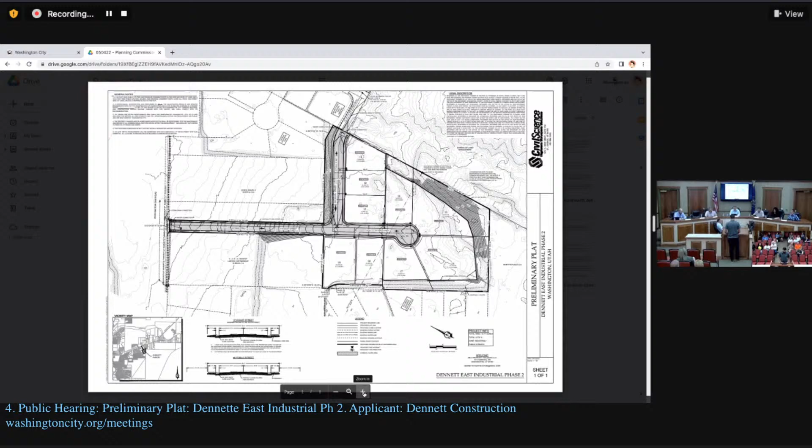Thank you, Commissioners. Eldon Gibbs, City Planner. The applicant is requesting approval of a preliminary plat for the Dennett East Industrial Phase 2 subdivision, proposing 9 lots on 10.77 acres. The zoning designation at this location is Industrial 2. The surrounding zoning is I-1 to the north, planned unit development residential to the east, and I-2 to the south and west. The subdivision is in the hillside overlay zone. The applicant submitted the required hillside application and met with the committee, which determined that this did not warrant their approval or recommendation for approval.

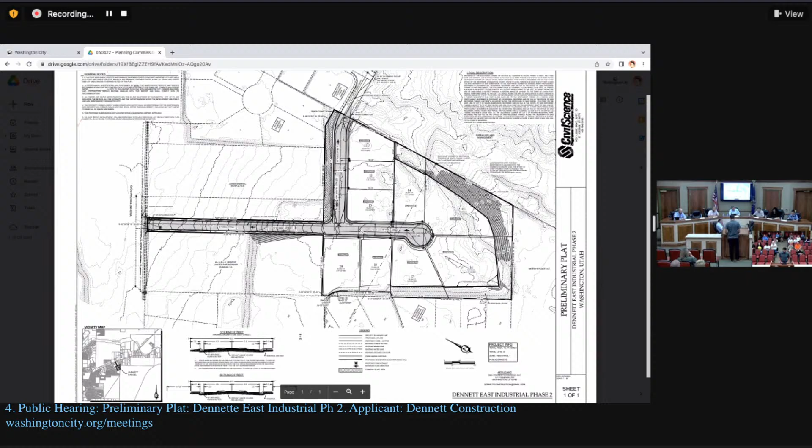The proposed subdivision conforms to the approved zoning. The request meets the subdivision requirements and other city ordinances as it relates to this location, and staff has reviewed the request and recommends approval with conditions of the preliminary plat as outlined. Staff recommends that the Planning Commission recommend approval of the preliminary plat for the Dennett East Industrial Phase 2 subdivision to the City Council based on the findings and conditions in your report. I'm happy to answer any questions you may have.

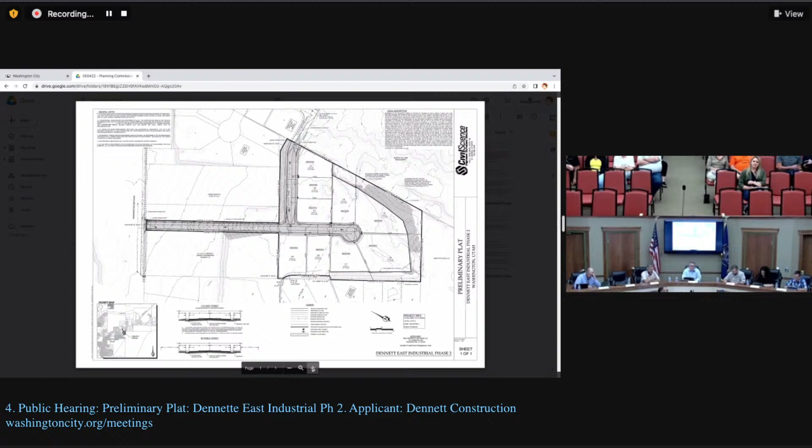At this time, commissioners, if you have any other questions, hold on to them. I'm going to open this up. This is a public hearing. For those of you here in the audience that would like to have a say and speak, if you have any comments, suggestions, or questions regarding this project, please take this opportunity to do so. When you come to the microphone, please state your name for the record.

It doesn't appear that anybody would like to speak on this particular item. I'll look for a motion to close the public hearing from the commissioners. This is Commissioner Bullock, I make a motion to close the public hearing. I second. I've got a first and a second. All in favor? Aye. Okay, the public hearing is now closed.

I'll open it up, commissioners, for any additional questions or comments. This is Commissioner Bullock. I don't know who to address this to, but the public street coming in off of Washington Dam Road, shouldn't it be 60 feet in an industrial area? Because when you drive up Sand Hill Boulevard and there's two semis parked next to each other, it's hard getting a truck through there.

Typically we would have a wider street, but because this was property that was purchased and already in place exactly for this street, we agreed to a narrower right-of-way, with the understanding that if there's any future development on lots on either side, they will have to widen the street. But we're also making this no parking along this segment. Both of those are already developed. Any additional development of those lots would require it.

Okay, but we're going to have cars parked here because this is cutting into K&J's property to the west, taking basically 55 feet of their road, and part of their driveway going in. Their cars will now park along this street because there's no more parking up front. Yeah, this will be no parking. Okay. You hope.

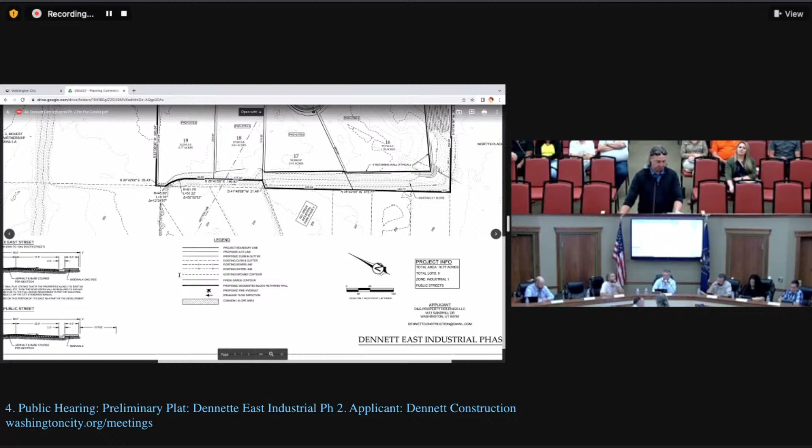What's the hatched area on 1340 South, just to the north? Let's see if I can find it. Common area, slope area - that's what it's labeled on the plat. So that'll just be desert landscape, for retention, right? They'll use it as landscape area, probably with some type of slope protection on it.

Well, this is Sheila - I think it's a little funky, but it's a mess there right now. I don't know, maybe this will clean it up. I think it's a good addition. I just worry about the traffic patterns with everything that's going to go in there, and then who's going to maintain that common area?

That would be my question. Is there an HOA with this? Who maintains this common area? Or is it just going to be dirt? I haven't seen any HOAs. It'll have to be an HOA - so all the property owners, it's just like a residential one, but it'll be an industrial one. They'll all have to be responsible for that.

Is he required to have CC&Rs? Because I haven't seen any CC&Rs that he's done on anything. I don't know if they're required to have those. They just need to say, you know, an HOA could have one paragraph that says the owners will be in charge and maintain it. It says it right there in the general notes.

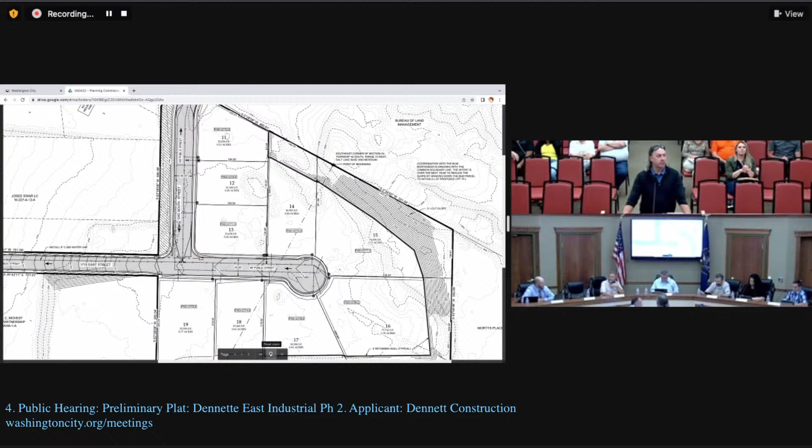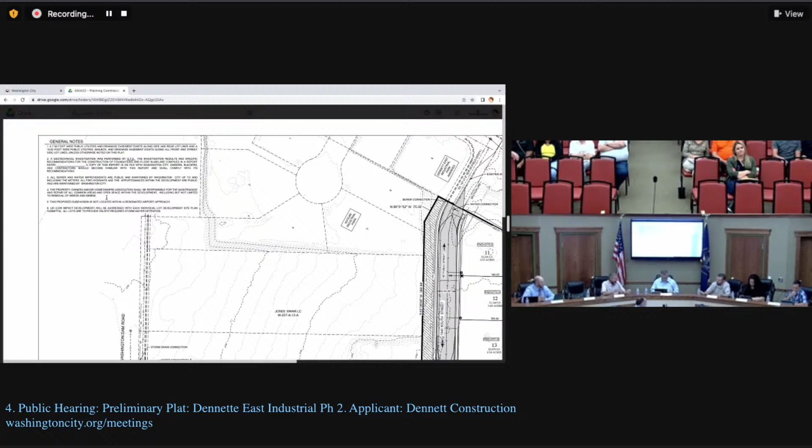When there's common area that won't be privately owned, we require evidence of creation of an association and evidence of some governing document to define how they're going to operate. So note number 4 right there - that's why we put number 4 in all of our plats. Exactly, okay, that's what I was curious about.

That's my office - that's one of my main functions on plats and final plats, making sure those documents have been submitted and that they're in existence before they get approved. All right, cool.

Commissioners, any other questions? I'll look for a motion on item number 4A. This is Commissioner Bullock. I make a motion we approve the preliminary plat for Dennett East Industrial Phase 2 subdivision, located at approximately 1600 East Washington Dam Road, and send this on to City Council with the findings and recommendations.

Commissioner Tupou, I second that. Okay, I've got a motion by Commissioner Bullock and a second by Commissioner Tupou. Individual voting: Commissioner Bullock, aye. Shield.

I'm going to vote nay. I have a hard time with not really seeing CC&Rs or HOA on this. I look at White Sage and the issues up there with parking and on the street. So that's my reasoning.

Commissioner Tupou. Aye. Commissioner Mitchell. Aye. Commissioner Hanson. I'm an aye as well. The motion passes. We'll send that to City Council with our recommendation for approval.

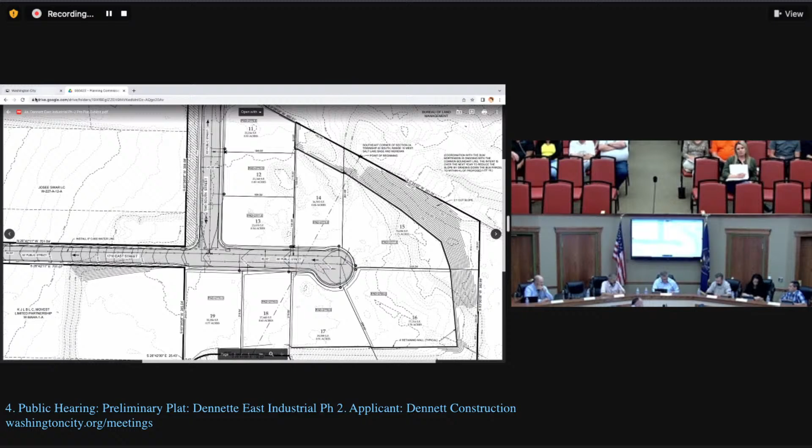Item number 5A is also a public hearing for consideration and recommendation to City Council for a zone change request Z-2206 from MH to PUD-R, located approximately at 51 Turner Drive, 50 West and 100 North. The applicant is Tom and Sarah of the Rockworth Company. I'll turn the time over to staff for their report.

Thank you, Commissioners. As stated, the applicant's requesting approval of a zone change of approximately 11.22 acres. The property is currently a mix of mobile home, PUD, and R3 zoning designations. The applicant wishes to have the property rezoned to a planned unit development residential zoning designation under the multifamily standards.

The PUDR request is for the purpose of developing the 11.22 acres into an apartment complex in the form of 58 one-bedroom units and 122 three-bedroom units. This would be a total of 180 dwelling units throughout the development project, equaling a density ratio of 16.04 on the 11.22 acres.

The surrounding zoning of the proposed development is open space, which is the I-15 corridor to the north, R16 to the east, and R3 and C2 to the west and south. The allowed density according to the general plan use map is 13 to 16 dwelling units per acre, and they fall in the high density residential designation.

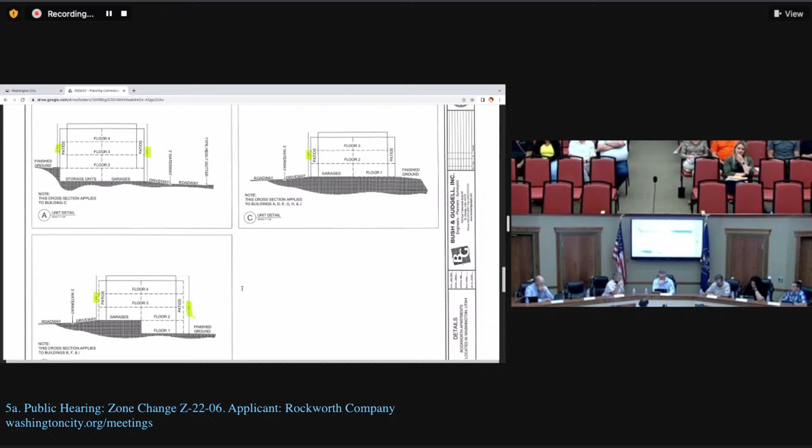This gives you a sample where the unit with the C detail is actually a 2-story with a garage and actual floor area, while the ones that are kind of 3/4 story have storage or no storage, as you can see in the different exhibits on these cross sections.

Getting into the exterior finish on the building, it'll be a mix of Hardie board finish with stone and stucco throughout. This is the units that have the 3-story with parking in the back. Below, this is what the 2-story looks like with parking around the back as well.

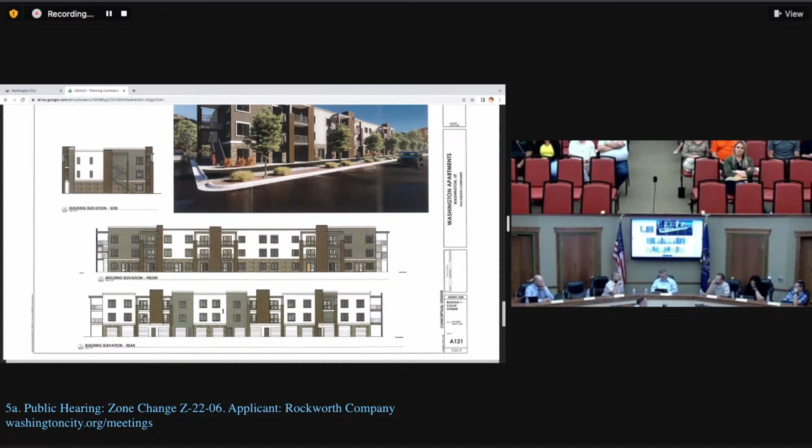The live picture versus the drawing. Here's a sample of the products: manufactured stone veneers, fiber cement with horizontal and vertical siding, stucco, and a fiber wood grain product, which isn't new but is being more utilized. There's a variety of different finishes so it's not stale.

So with that, commissioners, that's my report to you. I'll be glad to answer any questions you have before you open up your public hearing.

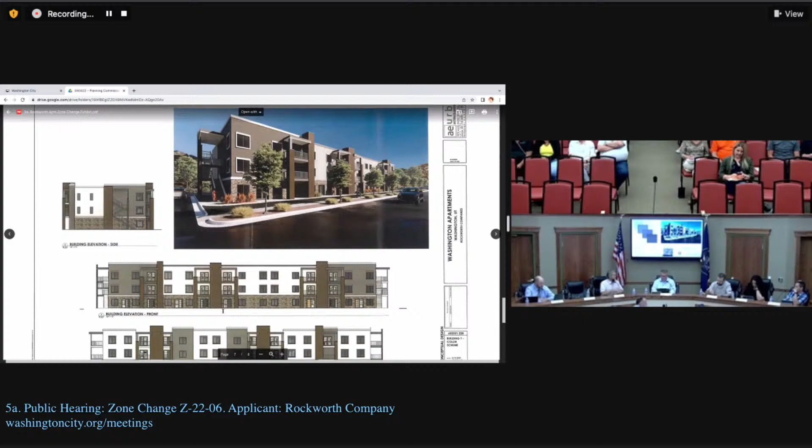Commissioner Bullock: On Building J, it shows carports in that section. Are those carports the dotted line there? And is it that way on Building I too? We'll have the applicant come up, but I'm going to guess Building J is a 4-story, and Building I... never mind, I believe it will be a 2-story with a driveway.

But is there parking in front? Yes, that's every one of these, driveways going into the underground garages. I wouldn't call it underground parking, more like garages. And then there's an elevation change coming around to the fronts. That's what I was wondering about, I didn't see that until you mentioned it. I was worried about parking for those units. Every one of them has a driveway into the parking, garages underneath, and then they'll walk around or likely enter through their garages, I would imagine. We'll have them clarify that, but I imagine that's what they are.

All right, commissioners, any other questions, initial questions for staff?

Commissioner Mitchell: A question that comes to mind for me - so 500 West is the only entrance or exit, correct? Theoretically that would be, we'll pull that up here. I'm trying to visualize in my mind. There's not a light at that intersection of Telegraph and 500 West, right? Not yet. That was just a thought I had, regarding the potential traffic flow.

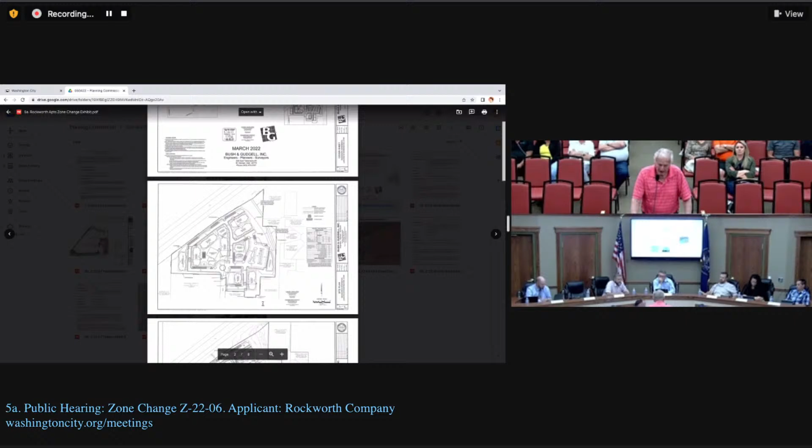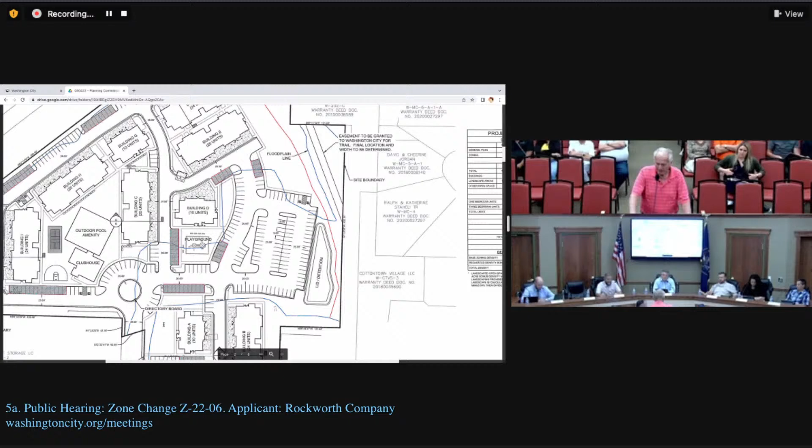I'm concerned that if more water comes down and goes out into the creek, it's going to create a wash there also, just like it has down below where it comes off the apartments below. I don't know if I should address all these things here in public or whether I should come in and address them at another time. So that's up to you, what you want me to do.

My recommendation, George, would be to give us the short version this evening so it's on the record. City Council has a chance to review these, and then I would invite you back.

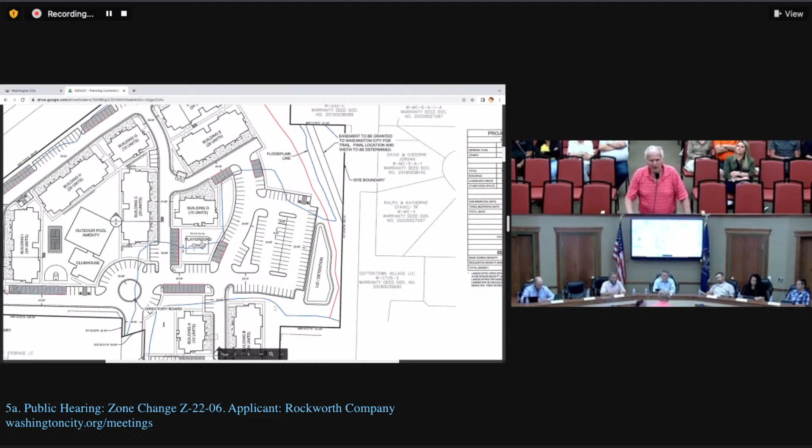Okay, I need to know where the creek is, that's not turned in any direction that I can really see it. You'll see there, George, the floodplain line at the upper right that's in red and blue. You'll see those lines there on the monitor.

This here is our property line right here, and it goes up to up there. This is the floodplain. The creek, I can't even see where it is, but it comes down through here. So any water that runs off of here would come out in one place.

Now they're putting this fence along here. They're going to have to create a place where it comes out in one place instead of, as it did before, on long wide area. The creek now that's here has washed about 8 or 10 feet deep instead of being flat like it was.

So if the retention pond fills up, where is that water going to go? Is it going to go into this here, and out into their place, and cut another gully in here just like it has down here, where we can't do anything with?

I don't know. Those things have got to be addressed. I'm also concerned that... excuse me, only because she can't hear you, and we want to get it on the record. I'm also concerned with the size of sewer pipe that runs down through the creek by putting another 181 units into that.

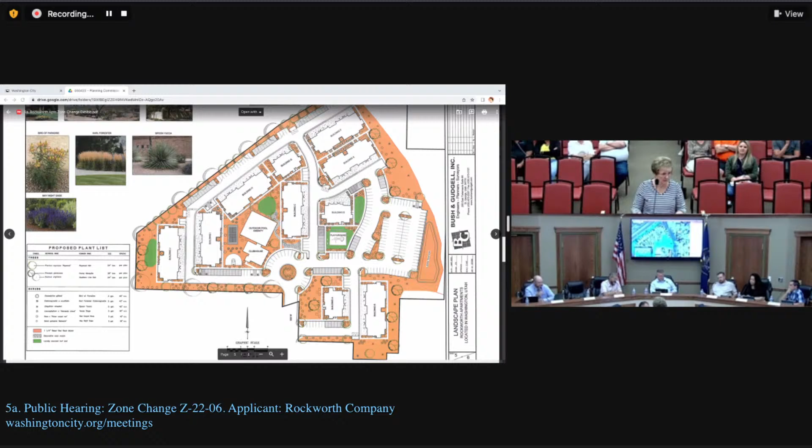The challenge with your backyard isn't you, it's that there's a creek down there, right? Yeah, I mean, kids are kids. My kids were kids once too. So I'm just concerned about that, and that many more kids. So that's all I have. Thank you. Thanks, Katherine.

George, we'll let other people come up before we do seconds. Unless no one else is coming up, is there anybody else that would like to come up for the record?

All right, George. One thing I forgot to talk about is where they come out onto Telegraph, that's an illegal street. All the streets should be 90 degrees, and those don't come in at 90 degrees. So the city's got to look at that, and look at how you're going to put a light on that street the way it's designed now. It's almost impossible because of the way the street's designed.

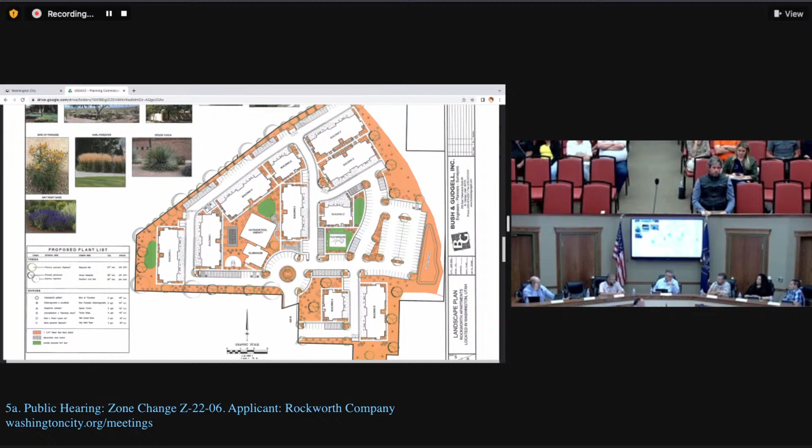Have we analyzed that, Drew? I haven't done that analysis, so I don't know for sure how to answer that question, just because I don't know the answer. Okay, but that's just what everybody's talking about—that was the question that came to my mind. With R3 and the trailer parks, there was kind of yards and some space between them, so it's likely that they could have had greater density than they actually had.

If you look at the old images, you'll see that even though trailer parks have their characteristics, there's usually space between them because they're just little mini houses with folks having a little yard, so it's likely they could have accomplished greater density than they did.

If they were to come back under that same zoning, we'd have to recalculate their maxes. It looks like it's zoned the same as the Pearl condominiums, general plan designated high density. We don't have high density zoning, but we have general plan high density, which means it's high density residential with a density ratio stated within that. Our general plan says high density is 13 to 16 dwelling units per acre, somewhere in there.

Our PUD allows for increases in credits if you do certain things, but they probably don't need any credits. They're at 16.04, but they added 30% extra landscaping area they could have left open and not gotten that credit. Instead they're actually going to landscape it, put trees, shrubs, bushes and ground cover over 30% more than what they needed to according to the PUD zoning. So in essence they can get a little bit more; all they're really needing is 0.04 dwelling units per acre to get to the 180.

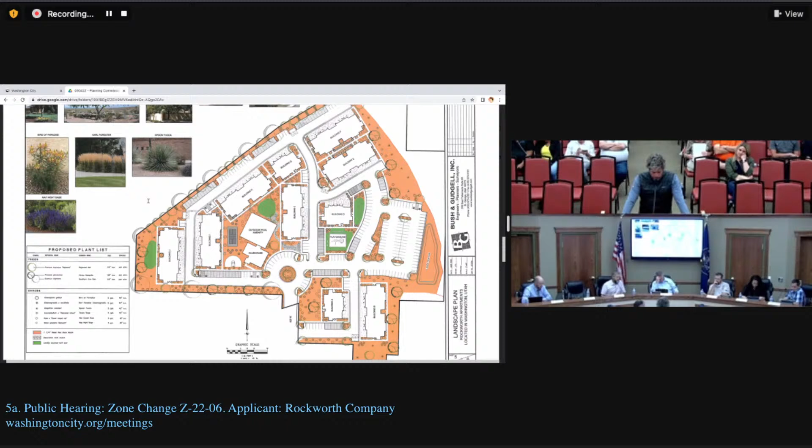We know and recognize that, and expect that all of these concerns will be addressed through final engineering. A couple of the other conditions that have been raised are also met by the conditions. Condition number 6, as has been pointed out, calls for a block wall along the north boundary and also along the east boundary. We're comfortable with this condition, but we do have a question for staff and would like to work this out.

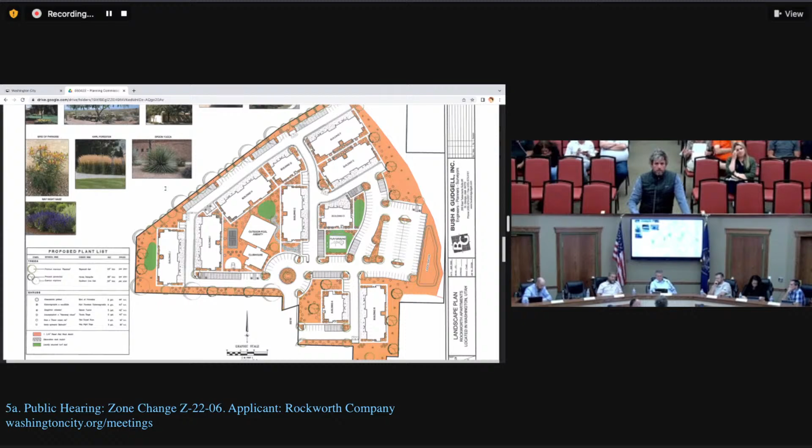One of the things is that along Mill Creek, there are plans by the city to have a future trail system. We're actually dedicating an easement along there, so we just want to make sure that as we're working with staff on this wall, there's also access to the trail and we maintain access for our residents and the public, and make sure the wall is designed accordingly.

Additionally, one other condition we'd like to point out is condition number 11. We're a little— scratch that. Okay, I've already scratched it. Again, just like to thank staff for the opportunity to work with them.

We do feel like we've created a good project. I know there's been some questions about density. As Mr. Ellerman has pointed out, we're barely over the allowable density, but we're still open to the PUD process, going through it to make sure this project is one that the city is comfortable with and that we're comfortable with as the owners. 16 units to the acre falls under the high density requirements, and we feel comfortable with that density. I'll just point out one additional concern that's been raised, and Mr. Ellerman, if you could pull up the site plan.

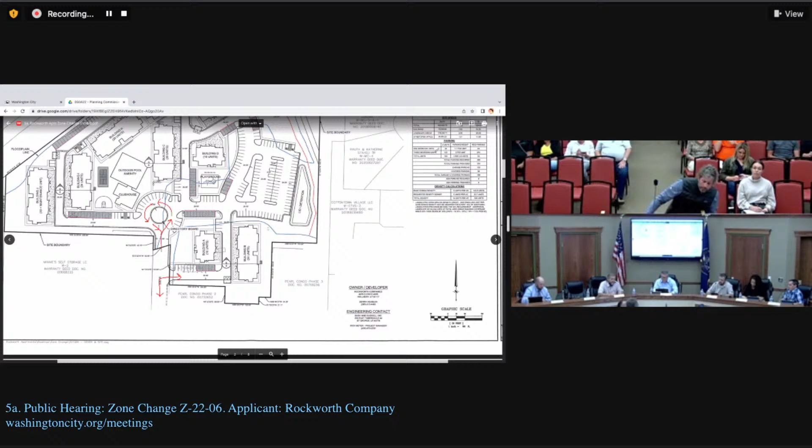Adam, thanks for your time, I appreciate it. Sure, one last comment Commissioner. Just to clarify, in the staff report it calls out 1 and 3 bedrooms, but they're actually a mix of 1, 2, and 3s. I think the confusion arises because the parking is calculated the same. I'm just going off your call out. Yeah, maybe that was for parking. So there will be 1, 2, and 3 bedrooms, I just wanted to clarify that. Approximately 58 ones, 92 twos, and 32 threes, I believe. Thank you.

If you can go back to the GIS map, where Cotton Town, what is it called? Cottontown Village, Coles and all that, Cotton Mill number 2. That empty space right up there, if you go up by the freeway, it's just that triangle right there. Is that future growth? What is that?

That's drainage, that's a big regional drainage. Oh is it? Okay, that's what I was wondering. I didn't know, because I thought the same thing, I thought well we'll just maybe pop through there and add another one. But that's, I am correct, right John? It's a major drainage swale. Okay, and it picks up a lot of the I-15 water, if I remember right. So yeah, that's what I was curious about, what that was and why it was left there, just for an emergency access if they had to.

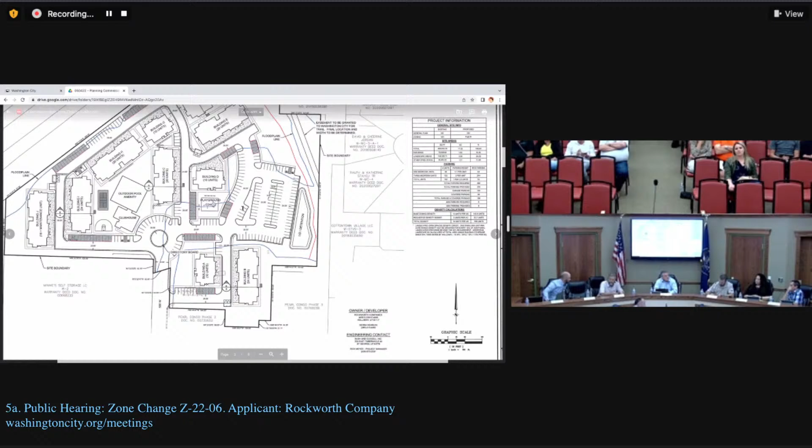Of all the comments you've heard this evening, are there any that have not been or will not be addressed and mitigated with staff, either prior to or after this? Is there anything new, like oh we didn't think of that? I mean there's answers you guys know from prior meetings where these things have been addressed, and I hear residents say things and I'm like no. The only thing that popped out is we want to look into the sewer line and see if that's been taken care of. I'm sure it has something to do with it, it's downstream, but it would be nice to make sure that's been addressed. I'm sure they knew about it because that's probably the first people you guys called, was the city. They came to us.

I don't know about George. Okay, because I remember hearing about this a while back. So I just want to make sure they might have run their snakes and or cameras and found out what was going on. We'll look into it, and I'm sure we'll know. We'll just get with the sewer department and find out what those things were and get the, you know, what's been addressed for them.

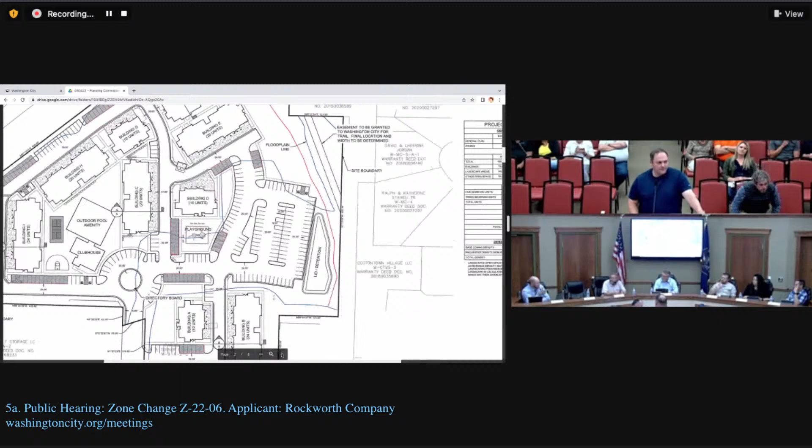Hey, my name is Rick Meyer with Bush and Gudgell, and just to reiterate what Thad's saying, the current setup with the mobile home park doesn't have a detention pond, and it's fair to say there's a pretty high impervious area in that mobile home park. So by putting in something similar in imperviousness as the mobile home park, but adding a detention pond, it's going to be a lot lower runoff than what the mobile home park was. This project will have curbing, inflows, and collection locations for stormwater—things we require now that weren't even on our books when that project went in.

Can I just make one other comment? Just since we're making comments. Not sure if I lost control of this meeting or if this is normal, but go ahead, Rick.

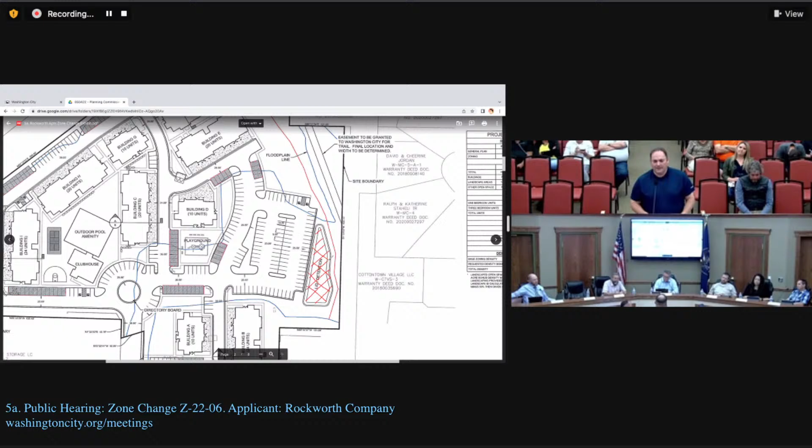Just to speak to the children issue, I understand the concern and everything, but there's going to be a lot of amenities here: playgrounds, a pickleball court, basketball, a pool. I think that's going to keep the kids on their grounds instead of somewhere else. So thanks. Perfect, thank you.

Commissioners, do you have any major concerns about this project that we haven't addressed, or something making you want to go one way or the other on the vote that's worth discussing, Chairman? Before that, there's also the question of how much density they could have had under prior or existing zoning—staff will try to get a better estimate on that, as well as the sewer question you'd asked previously. We'll try to get some data on that.

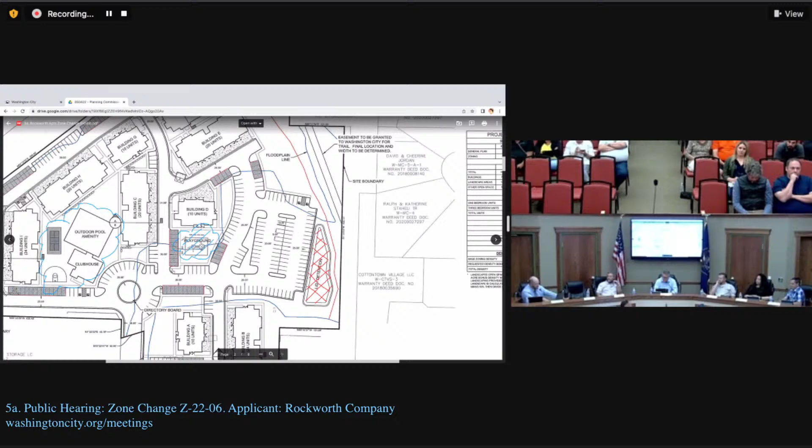I'll still leave my question open. Commissioners, anything else you'd like to say between us? Commissioner Mitchell, I think the one thing that's still hanging up a little is that density possibility, just because anybody who's been in that area knows how complicated it can be to function. Most of the time you hit the stoplight, you go through the other places to get to the stoplight to come out onto Telegraph if you're smart. That's my only reservation—potentially if we're increasing the density in that location, what would we be doing? I honestly don't remember.

Hey Melody, I'm going to put you on the spot to find out if we've closed the public hearing. I believe that we did, but I need to confirm that. You did not officially, but twice—yeah, you did close it. We did close it. I'm going to look for a backup motion to close the public hearing from the commissioners. Ms. Schill, I would recommend we close this public hearing again. This is Mitchell, I second. All right, I've got a first and a second to close the public hearing again. All in favor? Aye. Okay, back to where we were. Sorry.

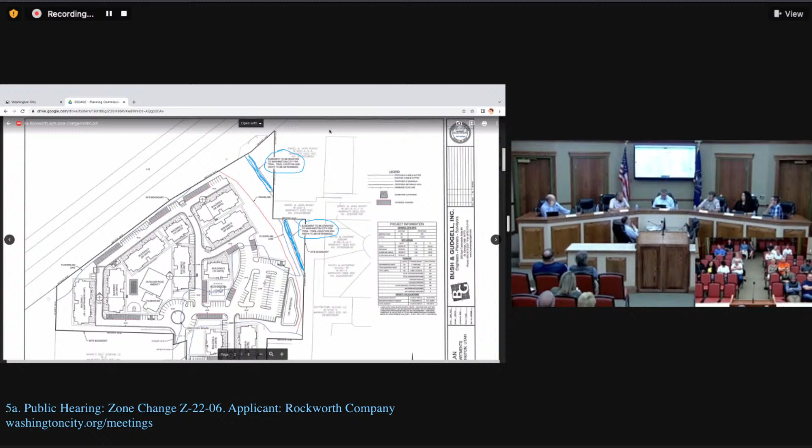So in my limited knowledge, I'm still kind of hung up on what they potentially could do versus what they would do here. Are we really? So this body essentially can table, recommend approval, or recommend denial. I don't see anything that justifies tabling. There's a couple of issues staff are going to get research so that answers can be given with more clarity on the sewer and on the previous density.

I think what Commissioner Schill attempted was to recommend denial and then give his opinion on the record so the council can know the reasons why, and the commissioners are welcome to do that either at the motion, at the second, or at their vote. That help you at all? I know you're newer to this. And so it's essentially a recommendation of denial on density, and then you've got Commissioner Schill's personal views on what the density should be.

So again, I have a first by Commissioner Schill. I'll look for a second or additional comments or another motion, correct? Well, you would just say that the motion, if nobody seconds, it just dies with a lack of a second is what you kind of do. So those are kind of the options. Any time anybody makes a motion, nobody wants a second, the motion just dies due to a lack of a second. All right. So I'll look for any of the three of you to second that, or I'll look for a new motion.

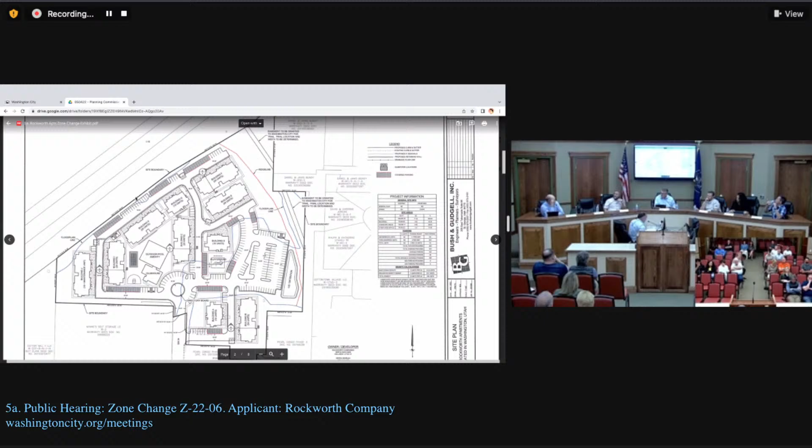So with that being said, the motion of denial passes 3-2. The motion of recommending denial, sorry, the motion recommending denial passes 3-2, and this will be sent to city council as such. Correct, and they will hear it on May 25th.

So May 25th, those of you here that have interest in this particular item, if you'd like to come and take your 3 minutes at city council as well, you're welcome to do so.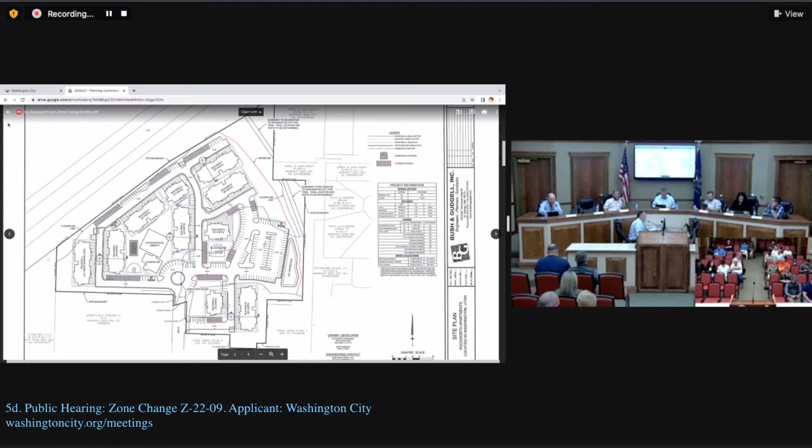And I have got to give an award to Mr. George Staley. I have never seen somebody get so much leverage out of his 3 minutes. It's pretty good. I don't even know how that happened.

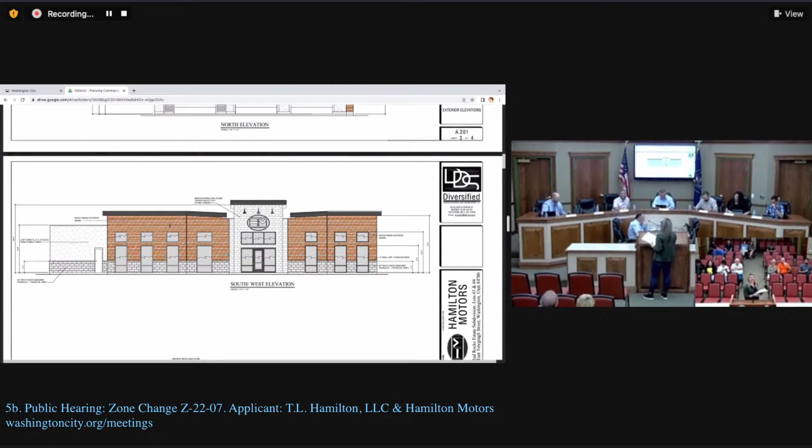I think she just asked for greater restrictions, didn't she? After my project, right? So is that north boundary the boundary along Frontier?

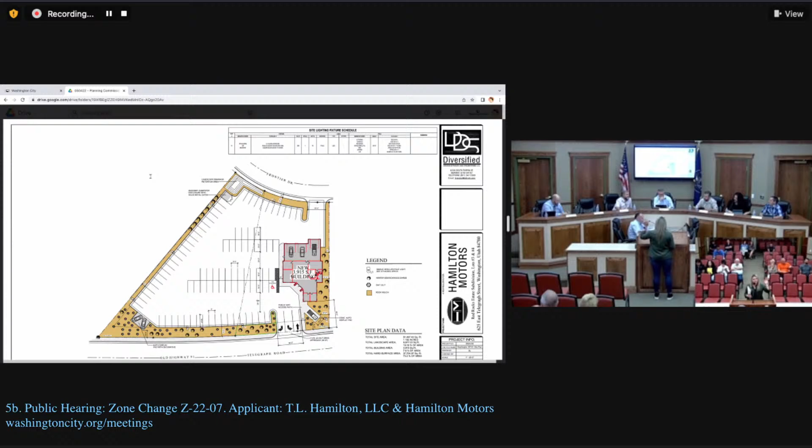If you Google Hamilton Motors Lehi, you'll be able to show a street view of the building - that might be useful. Are you going to bring that old truck to us or leave that one up there? I like that one, who knows - it's cool, huh. Yeah, I did submit some pictures early on to Eldon, and they didn't make it in the packet, but if you Google it, you'll see what the existing building looks like.

Sometimes it takes the old dog a little while to figure out Airplay. Oh, I'm on my laptop. I can do it on this one. I'll get there. Being tech savvy wasn't in my interviews. Which one are we going to again? It's conference room or council room in all caps. There we go. So that's the truck I was talking about.

That's the building there. What was that business? An assisted living center. Yeah.

I'll just go along the road and kind of show you the look there. Your parking lights in your parking lot, that won't fly here. I know, I know those lights.

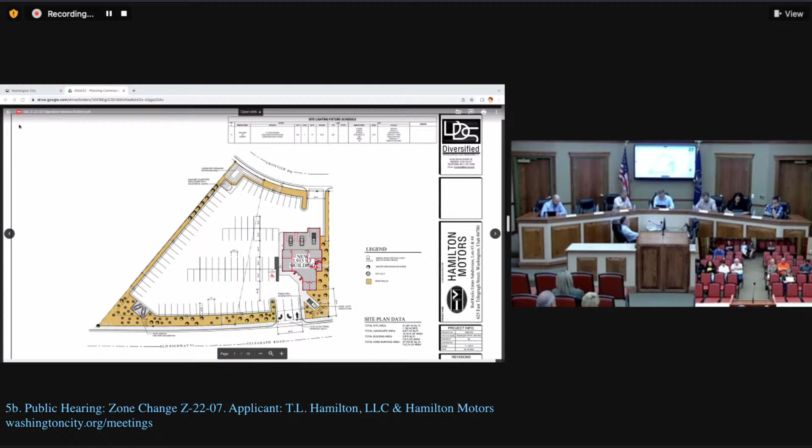I've got a motion by Commissioner Tupou. I've got a second by Commissioner Bullock. Individual voting: Commissioner Bullock, aye. Shield, aye. Tupou, aye. Mitchell, aye. Hanson, I'm an aye as well. Item number 5B passes. We will send that to City Council with a recommendation for approval, again on the 25th of May.

We'll move along to item number 5C. This is also a public hearing for consideration and recommendation to City Council for a zone change request, Z-22-08, from agricultural 20 to residential half acre, located at approximately 3930 South, 200 West. The applicant is Stephen Simister. I'll turn the time over to staff for their report.

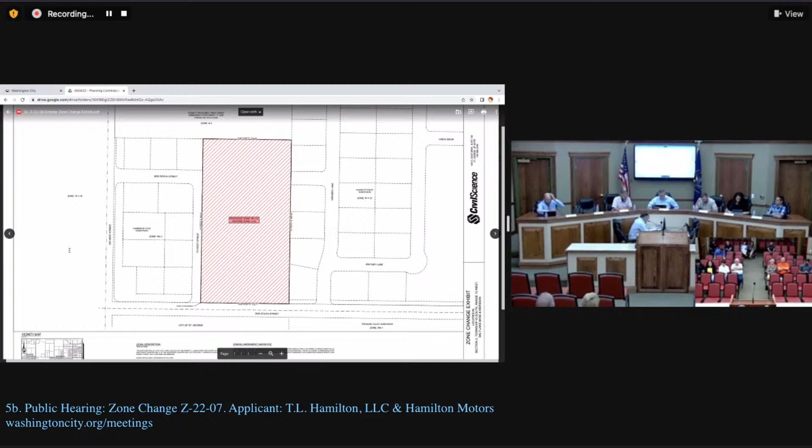Thank you. As stated, applicants request approval of a zone change of approximately 4.427 acres. The current zoning is agricultural 20-acre minimum. They are wishing to go to the proposed residential agricultural half-acre minimum, referred to as the RA half zoning designation, for the purpose of developing the parcel into a personal residence. This location has a general land use designation of low-density residential, which allows for the R110, R112, and larger zoning districts. Surrounding zoning of the parcel is A20 to the north, R112 to the east, RA1 to the west.

St. George City zoning is to the south, and it appears to be for larger estate lots, as I looked on the aerial view. Staff has no concerns with the proposed zone change as outlined; the applicant appears to be in harmony with surrounding land uses. Staff would therefore like to recommend that the Planning Commission recommend approval of Z-22-08 for the zone change from A20 to RA half, on to the City Council based on the findings in the report. I'll be glad to answer any questions.

If you want, I'll bring this up on the aerial, unless you kind of know where it is. Then I'd be very impressed with you.

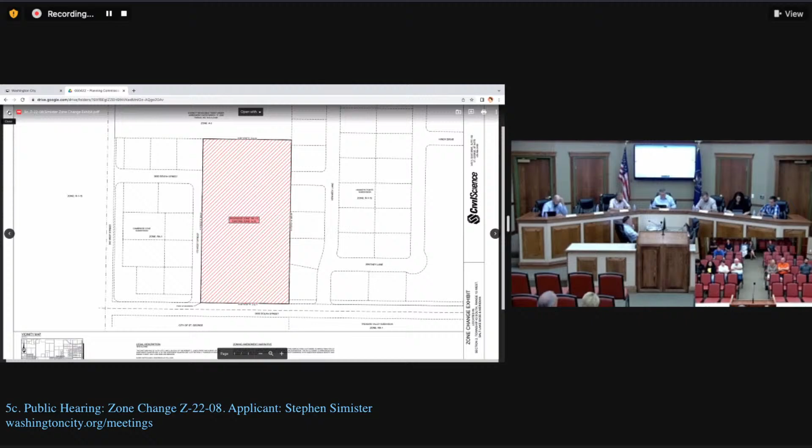Commissioner Tupou seconds the motion. Motion by Commissioner Bullock, second by Commissioner Tupou. Individual voting: Commissioner Bullock, Aye. Commissioner Shield, Aye. Commissioner Tupou, Aye. Commissioner Mitchell, Aye. Commissioner Hanson, Aye as well. This motion passes unanimously. We'll send that to city council with a recommendation for approval.

Item number 5D is also a public hearing for consideration and recommendation to the city council for a zone change request, Z-22-09, from Open Space to C3. The applicant is Rusty Hughes on behalf of Washington City. We'll turn the time over to staff.

Thank you. As stated, the applicant is requesting approval of a zone change of approximately 0.78 acres. The request is from Open Space to a proposed C3 zoning designation. The C3 request is for a possible land trade with the adjoining property owner. The C3 designation is needed for possible signage use.

The current needs relate to a particular sign out there now - the Sienna Hills sign needs to be relocated. Most of you have heard there's an auto mall coming into this particular area. If you haven't, you know where you've been, but anyway. So the city is wanting to trade land. Hey John, have you heard of the auto mall? Okay.

So we're wanting to trade land. The city acquired this actually through UDOT - it was left over from the I-15 corridor and was given to the city. It's just a thin piece that we'll never be able to develop for much of anything, so it's a great piece to trade. It helps them out. So that's kind of what this zone change is for, just to get it available for them to use for a possible signage location.

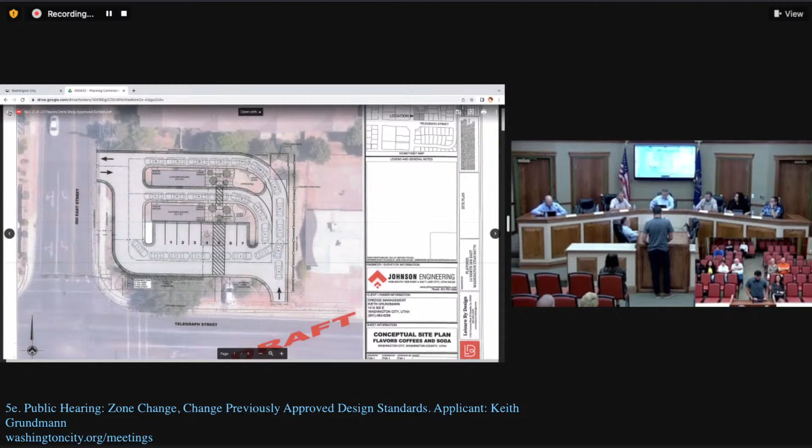The applicant is requesting approval to modify the previously approved design and use for the currently zoned PUD-C property. The applicant recently purchased the property to the east and has made changes to the site plan, including adding parking stalls, increased to 9 stalls. They added 2 stalls, improved on-site traffic flow, and increased open space landscaped area. No other changes are being made at this time.

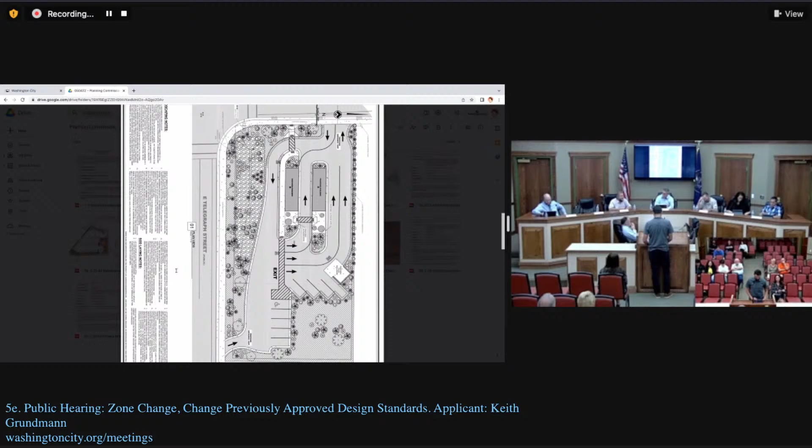Building elevations and those renderings stay the same. The original plan was approved on January 26, 2022, and the removal of the right turn lane was also approved on March 23rd, 2022. Staff recommends that the Planning Commission recommend approval of the modified Z-21-27 for the specific site design and use to the already approved PUD commercial site, onto the City Council. If the commission wishes to move this item forward with a recommendation for approval, you can use the conditions seen in your report. I'm happy to answer any questions.

This is Commissioner Tupou. I thought off of that exit there was going to be an island that would force them to go in and right out only, so they can't do a left. Correct, yeah, there's a center median added off of 300 East, so no left. I just don't see it on the drawings. We're going to put concrete out in that street, in the median. Oh okay, thank you.

So Eldon, the property to the east, that was the residence that was there? So that'll be taken down, the house will go. How many, what was the lot size of the residence? 0.18, I believe. Not big, but probably enough to give some more flexibility on the design. Yeah, push the access farther east off the corner, which is better.

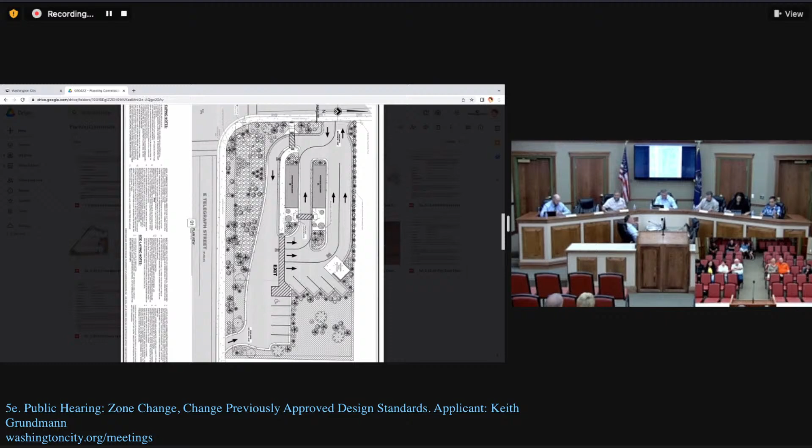Does this actually go to city council, Drew? It does? Okay, I've got a first by Commissioner Shield, excuse me, and a second by Commissioner Tupou. Individual voting: Commissioner Bullock, Aye. Commissioner Shield, Aye. Commissioner Tupou, Aye. Commissioner Mitchell, Aye. Commissioner Hanson, I'm an aye as well. Item number 5E passes unanimously, and we'll move that to city council with a recommendation for approval.